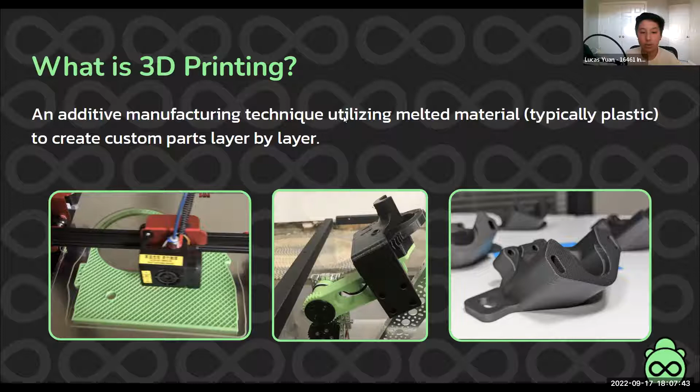Okay, so first we're going to talk a little about what 3D printing is. It's a type of way to manufacture things, and it's additive manufacturing, meaning you're putting material down instead of taking it away. It involves melting material, usually plastic, different kinds of plastic, to create parts layer by layer, essentially stacking parts layer on top of layer to create a composite 3D part in the end.

Here are a couple examples of possible applications for 3D printing. One is gears, which you can use to gear different mechanisms. On the bottom left, there are claws and arms. That one was an iris capture that we didn't end up using for Ultimate Goal, but it was a prototype that was made. On the bottom right is pulleys, which are generally used for power transfer, and that one specifically was used on a drivetrain to power the wheels.

And then obviously on the top right, you have aesthetics. You can do some pretty nifty things with multicolor printing, and those were sponsor logos that we had on our state bot last year.

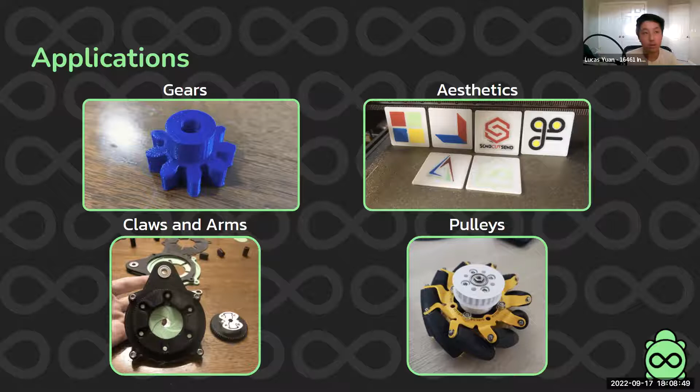Okay, so a couple advantages of 3D printing and why you would want to use this for FTC. First would be rapid prototyping and a quick turnaround time. 3D printing is honestly the best way to make prototypes whenever you want them. If you're factoring in things like shipping for custom or commercial off-the-shelf parts, it's going to take a lot longer for those to get to you than if you just printed something and tested to see if it would work.

Next is precision details. Typically with 3D prints, you can model things and they'll be very precise. You can model them down to the millimeter, so typically you'll have more mounting options than commercial parts that you would buy from a vendor like goBILDA or something.

Next is that printed parts are obviously going to be lighter than metal, and they're also quite cheap. A roll of filament is around $20, and you're probably not going to use more than 2 or 3 for your entire robot. I'm speaking from a team that uses a ton of 3D printed parts on our robot, and it's a lot cheaper than metal.

And lastly, you gain a lot of design experience and CAD skills from the development process of making 3D printed parts for your robot.

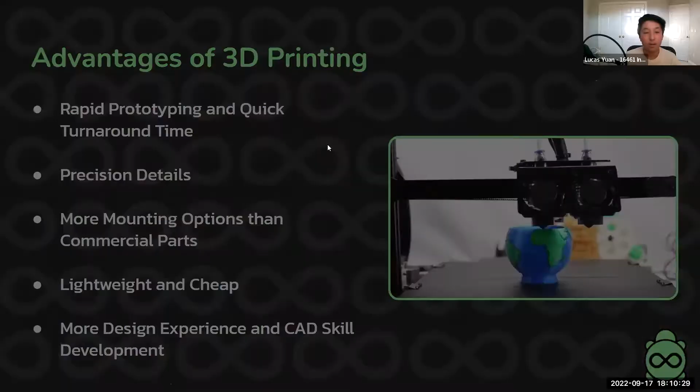But as you can tell, 3D printing isn't exactly a perfect process, and on the right is a failed print. A couple of disadvantages to this process is that plastics obviously aren't going to be as strong as aluminum or other metals, so it's not always going to be the best choice for high stress situations.

You're also restricted by the build volume of your printer, which just talks about how big your bed is. There are a couple ways to deal with this, but there are still limitations.

Next, even though 3D printing is great for rapid prototyping, it does take a while for prints to start and finish because you are making these prints out of very small layer heights. So while it's great for creating many prototypes, it may take a while for those prints to actually finish, especially if you're on a tight turnaround time.

And lastly, this is an issue that is slightly getting better, especially on the money side of things, but 3D printing still does tend to have heavy upfront costs from actually purchasing your machine. It also has costs time-wise, because it takes time to learn CAD and tune your printer to print well.

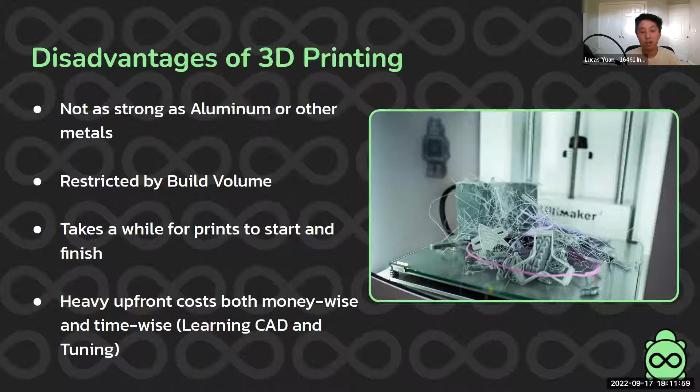So now we're going to talk a little bit about common options used in FTC. In the middle is the Ender 3 series, which is the typical starting budget normal option used for FTC.

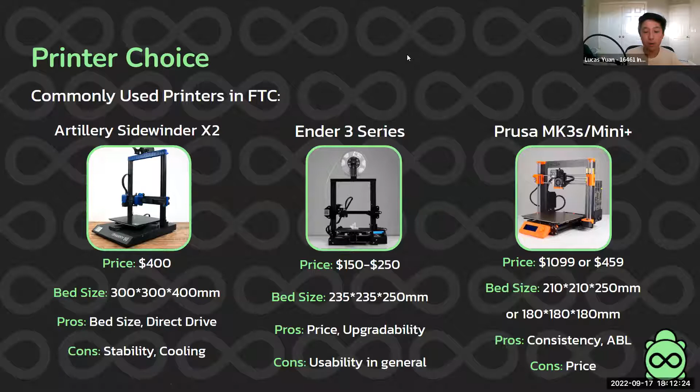They vary from around $150 to $250. I believe Micro Center is doing a promo right now where you can get one for $100, so they are very, very cheap. You can upgrade them with various parts to make it print better, but the reliability and usability of them in general is not the greatest.

And so that's where we move into the options on the left and right. On the left, you have the Artillery Sidewinder X2. It's a little bit more pricey than the Ender, but for the extra price, you get a bigger bed. You get direct drive, which is often seen as a better way to move filament, where your extruder gears are mounted on the moving tool head versus somewhere stationary.

But a couple drawbacks to that one in particular is stability, because when you are moving a big bed like that around, your printer tends to shake, and the cooling ducts on it aren't the greatest either, but it is still definitely a solid choice.

And then on the right is the Prusa Mark. We have the Prusa Mark III or the Prusa Mini Plus. For the Mark III, assembled, it's now $1,099, and for the Mini, it's $459. The bed is comparable to that of an Ender.

The pros are that this printer is going to be consistent. I've worked with this printer, and it's by far the easiest printer to get working. It's almost plug and play, and it has auto bed leveling.

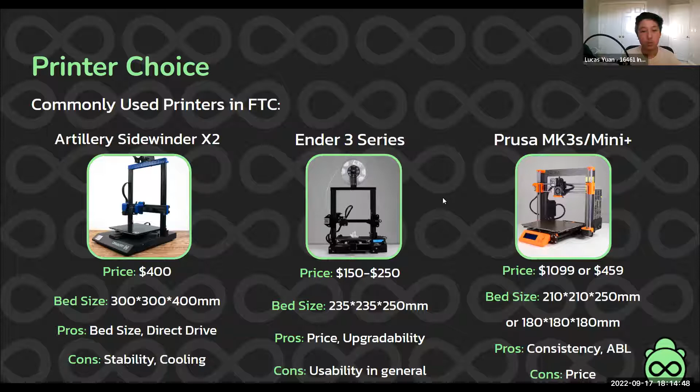Okay, so now if you've purchased your printer, you're obviously going to need something to print with, and that's where filament comes in. These are the four main-ish types of filament that are going to be used in FTC. The first is PLA.

PLA is typically very cheap and very easy to print. It's going to be the easiest filament to print out of all four of these, and I think in general it's the easiest type of filament to print, period. I would highly suggest starting with PLA, because it's going to make your life so much easier. Then when you start to get more advanced, you can move into some of these other filaments.

But PLA does tend to be a little bit less sturdy than something like ABS or PETG, and it also tends to degrade over time, although that's not really a concern when it comes to FTC.

Now, I think the second option most teams go with is ABS. In terms of good qualities, it's strong, quite a bit stronger than PLA, but they do tend to warp off the bed when you print with it, meaning essentially your print will fail. They also produce styrene fumes, which do give you headaches, so I would either install a filtration system or keep it in a well-ventilated area to prevent that.

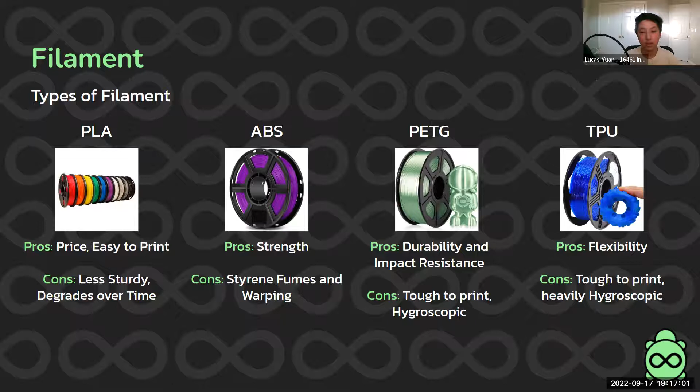And then lastly is TPU. TPU is a bit more of a novel filament, I guess you could say. It's a flexible filament, so it's not going to produce these super strong parts. It might be used for something like an intake or belts or something, but it does tend to be tough to print as well, and it is heavily hygroscopic.

Okay, so now we're going to talk a little bit about post-processing, which is essentially something that you would do after you're done printing to give your prints some unique properties.

On the left is probably one of the easier ones to do, which is heat set inserts. They're super easy to do, but they can be some of the most beneficial. Essentially, you take these little inserts and push them into your print with a soldering iron, and they'll add threads to your 3D printed parts for screws, and it helps better integrate COTS parts, and it won't round out your mounting holes compared to if you printed your mounting holes.

Next up is annealing. I'm not super familiar with this process myself, but the issue with annealing is that while it does increase part strength, it messes with your tolerances quite a bit, because what you're doing is essentially heating up the layers to fuse them together, but you won't have the precision of a 3D printer to help you do that, because this is usually done in an oven or something.

Next is vapor smoothing. Vapor smoothing pretty much just uses chemicals that react with the filament to fuse the layers together. For ABS, you would use acetone, and for PLA, you would use THF or ethyl acetate.

Okay, now we're gonna talk a little bit about CADing to integrate or better help your prints succeed. So obviously, in order to print parts, you will first need files of your parts, and these can be made in any software. Our team uses Onshape. Other people use Fusion 360, AutoCAD, stuff like that.

There's a couple things to keep in mind when designing parts. The most important is always to use few or no overhangs over 45 degrees, and that's what the diagram in the lower left-hand corner is talking about. The first two pictures have overhangs less than 45 degrees, but the last one has overhangs that are greater, which means you will need to print vestigial structures to support your prints. It's usually a headache to remove them, so try to avoid them if possible.

And then the second thing is tolerances, because while 3D printers are incredible machines, no printer is perfect, and a 4mm hole in CAD can always end up bigger or smaller after your print is finished. So you either need to do print tuning in your slicer, or you need to put in the tolerances in CAD. By tolerances, we mean maybe offsetting the hole to be like 4.1mm or 3.9mm.

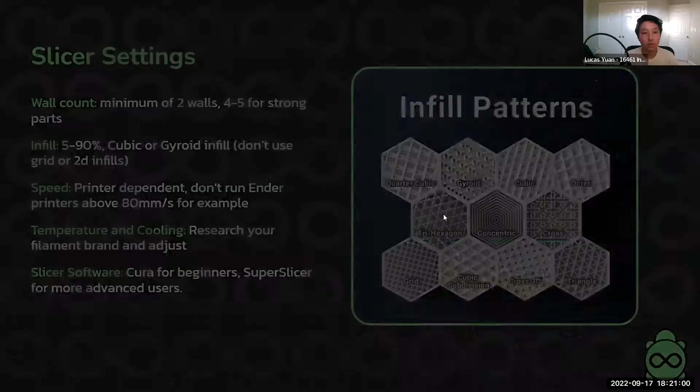And speaking of slicers, we're now going to go over a couple of slicer settings. If you don't know what a slicer is, essentially you have your CAD file, and then you need to put that CAD file into a slicer. A slicer does exactly what the name says: it slices your model into layers, and those layers are put into a file called a G-code file, and G-code is the type of code that your 3D printer will read.

As for slicer software, Cura is the most common choice for beginners, and SuperSlicer is for more advanced users. I would just suggest starting with Cura. It's honestly great for beginners, and most of the time you won't need to deviate away from it.

As far as slicer settings go, the first one will be wall count. Wall count just talks about how many perimeters you have on your prints as you go up. So you usually want to run with a minimum of 2, and if you want stronger parts, you want to run with 4 or 5.

Next is infill, and infill essentially talks about how much of the inside of a part you want to fill. There's a couple of reasons why we want to use infill. First of all, if every part we made was completely solid, it would be very expensive, it would take very long, and it would be heavy, which are things you usually don't want. So for infill, you usually want to do a cubic or a gyroid infill, because those are going to have the best strength in all 3 axes, since they are a 3D infill pattern, which is usually more preferable as opposed to something like grid infill.

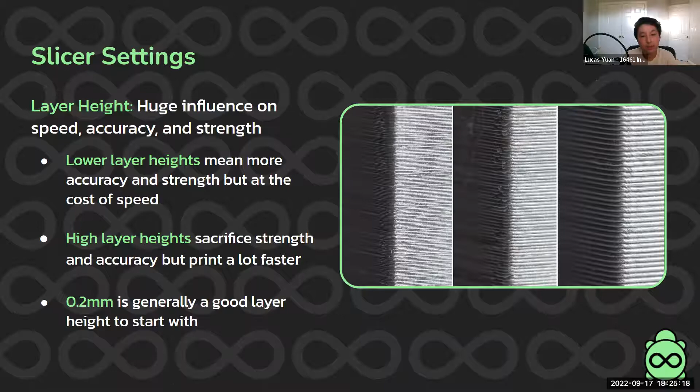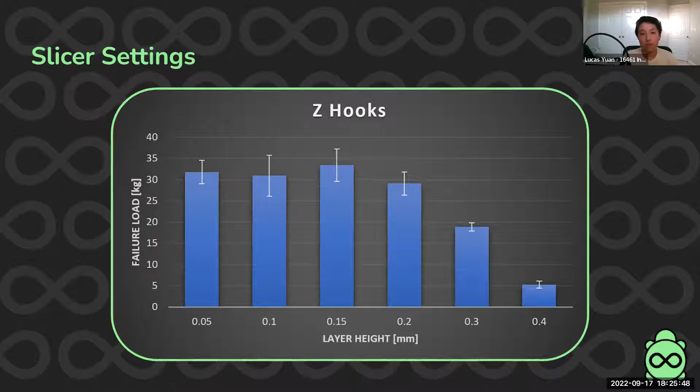This is just an example of composite strength tested at different layer heights. You can see as you increase layer heights, the strength tends to drop off a lot, and it tends to peak at 0.15. The reason I suggest 0.2 is just because it will tend to be a lot quicker than 0.15, and it'll factor into an even millimeter layer height.

Okay, now the last thing we have to talk about is print bed adhesion. This is very, very important because a lot of the times when teams see that their 3D printer is not working, they go down this rabbit hole trying to find what's wrong. But most of the time, it's print bed adhesion, and most of the time with print bed adhesion, it's that their bed is not level.

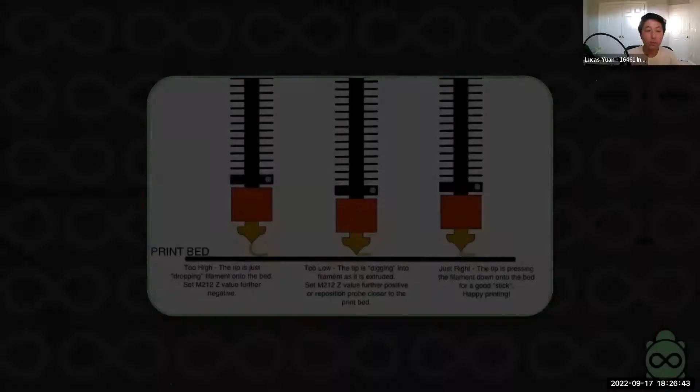So I want to talk about leveling your bed really quick. These diagrams show a bed that is too high, too low, and a bed that is perfect. What we mean by bed leveling is that your print bed is not flat, and you might not be able to see it with your eyes, but those tiny inconsistencies can completely throw off a print. If your print bed is just 0.2 millimeters off, it can completely throw off a print because it's essentially one layer too high, meaning that filament is not going to stick on the bed at all.

A lot of teams have issues with this when they're first starting 3D printing because it's a process that sometimes is just glossed over. A lot of people think that 3D printing is something that's super easy, and it can be, but you do need to make sure that your bed is level before starting any print.

This diagram does a good job of showing what it will look like if your bed is level. If your nozzle is too high, the filament will just droop onto the bed and it will not stick. If it's too low, the nozzle will be digging into the print bed and making ridges. But if it is just right, you'll see on the right of this diagram, it'll look like the layer lines are very close together, and it'll look like a very flat surface and it'll stick very well.

Now, if you know that your bed is level and you're still having print bed adhesion issues, there are a couple of things you can do. First, you can just adjust your height down to have that nozzle slightly dig a little bit into the print so that it can stick a little bit better. You can also wipe down your bed with rubbing alcohol or Windex.

Now lastly, we're going to talk a little bit about some printing resources you can use to get help. First is Core FTC. This is a 3D printing guide developed by our team 16461. We've already written the guide, but in the next few weeks we are going to be updating it pretty thoroughly. It'll go over pretty much everything we've covered in this presentation, the same if not more in depth, and it will also have stuff for troubleshooting print failures, as well as tuning your printers to make them better.

Next is All3DP. It's a website that does a lot of good data tracking for filaments, and it also does printer reviews. Next is CNC Kitchen. He has a website as well as a YouTube channel, and he does a lot of good scientific videos on filaments and print settings. The strength chart for layer heights I showed you earlier was actually done by him.

And lastly, my favorite one, the FTC Discord. This is not just a resource for 3D printing, but if you have any questions regarding FTC, the FTC Discord is the heart of almost all of FTC. Every day there are like several thousand people on there that are ready to help you, that are ready to help your team.

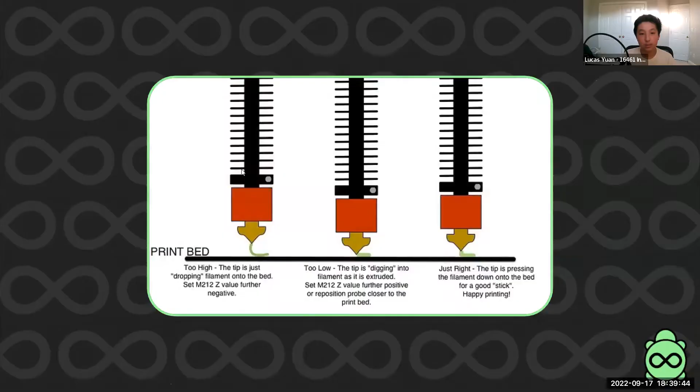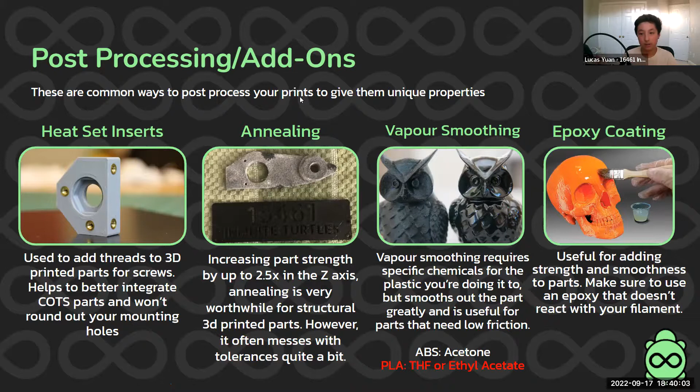I'd recommend looking up what your manufacturer recommends for keeping your printer maintained. Most will just require lube or replacing some parts every couple months or so. As for maintenance after prints, there's the post-processing things we talked about, but also if you're using supports, you'll need to remove those. And sometimes if your tolerances aren't perfect, I'd recommend taking a file or some sandpaper and sanding it down, because it can take a while to reprint.

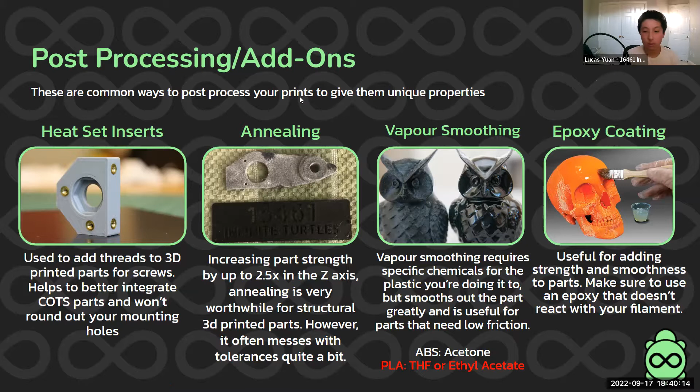Next question, okay yeah, company names. The company we use for laser cutting is Send Cut Send. They have a website, and you can reach out to them through email if you're looking for a sponsorship.

Next question is, have you ever casted silicone or something else in 3D printed molds? If yes, how did it work out for you?

I myself, and I think our team, haven't casted silicone in 3D prints yet, but we're planning on casting something in the very near future, probably in the next week or weeks or month or so. I'd say casting silicone with 3D printed molds is a great way to utilize 3D prints. It's a lot easier to cast something than to print something squishy out of TPU, just because you can print molds out of harder plastic instead of having to deal with printing a flexible filament, which can be very finicky at times.

Any other questions?